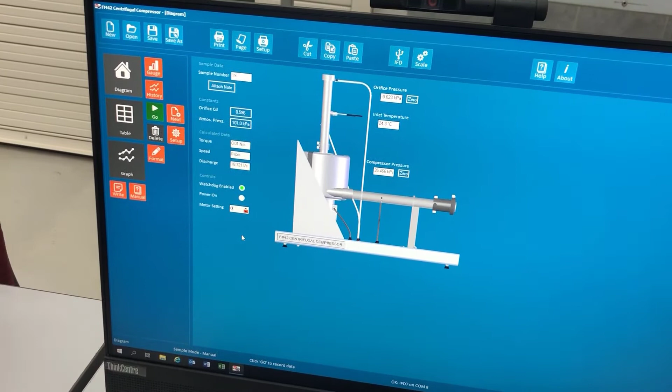So this compressor is interfaced with our software, okay? So our software can give you the reading on torque, on the speed, on the discharge. So this is the compressed air discharge. Also, it can control our equipment by powering it on and setting the motor setting. So the motor setting will give you the capacity of the compressor. Then we have the options to record our reading.

Now in this software also we can read the pressure at the inlet, pressure and temperature. So the air is coming here at the inlet and then compressed in 7 stages. And going out you have the compressor pressure and the orifice, okay?

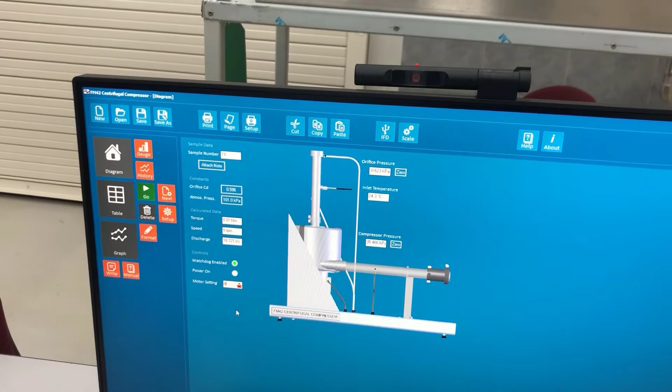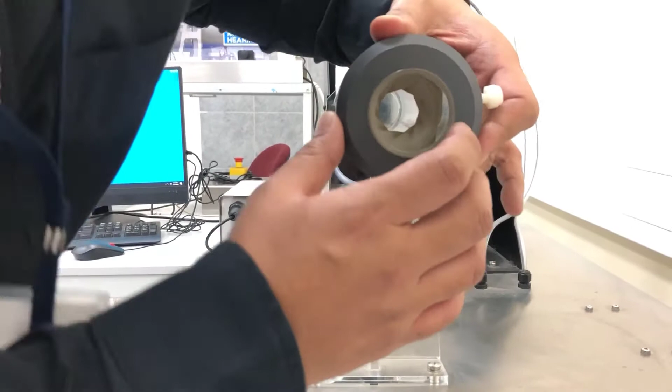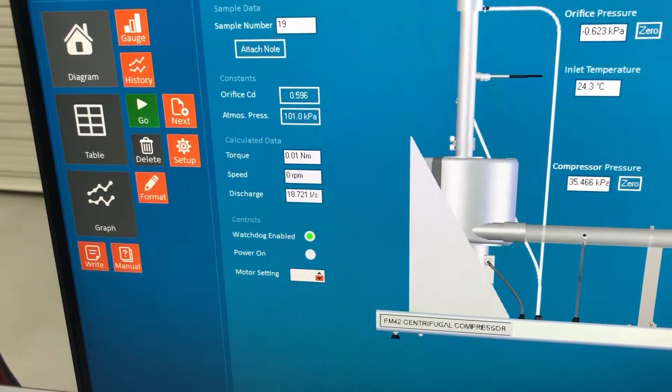So to perform a compressor system characteristic, first we need to set a fixed aperture. So for example, 2/3 opening, okay? At 2/3 opening of our aperture, we will vary the speed. So varying the motor speed. So for example, we will start at 100% with fixed aperture. We will observe what will happen to the reading. So powering it on, start with 100%.

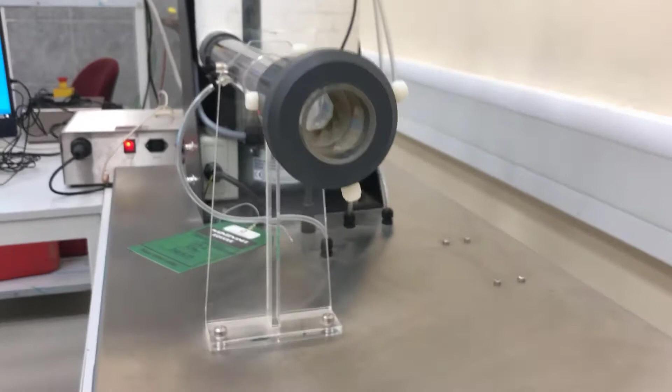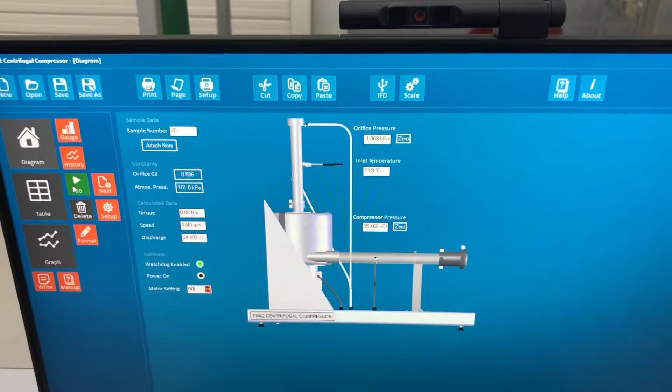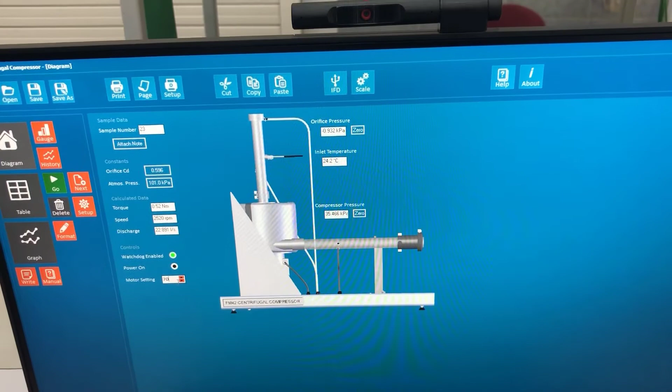Take one reading by pressing this go button here. Then change the speed to 90% with the same aperture opening, which is 2/3 opening. Then press the go button. Then make it 80%. Press the go button. And so on. So I'm decreasing the speed of the compressor. So 60.

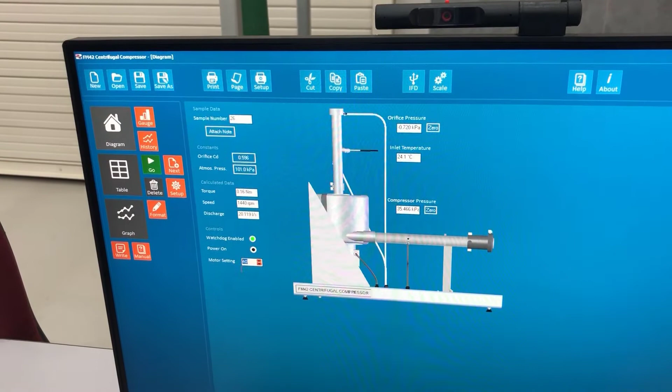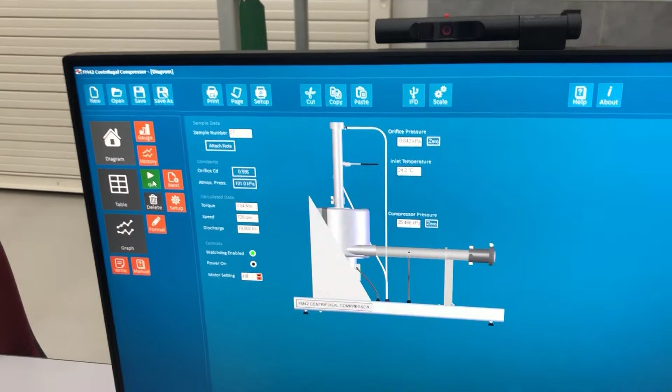50. Take the reading. 40. 30. Go, take the reading. 20. Go, take the reading. And let's say at 10. Go and take the reading. So from 100, I'm decreasing my speed. Okay? Observe the discharge of the compressor. The speed and the discharge.

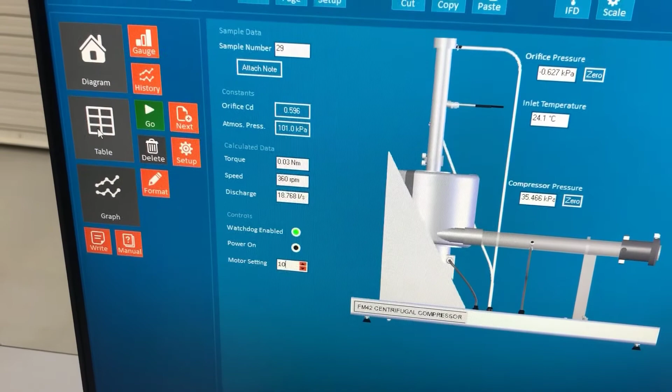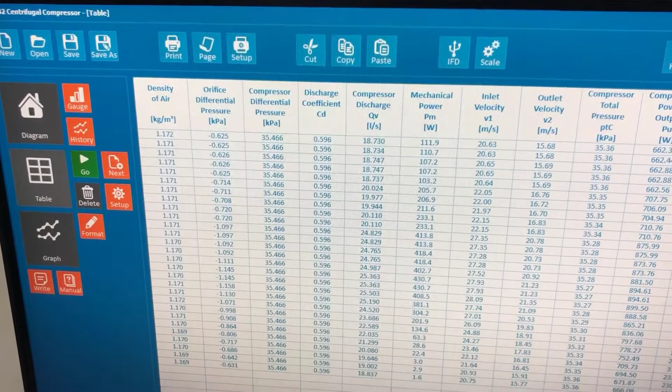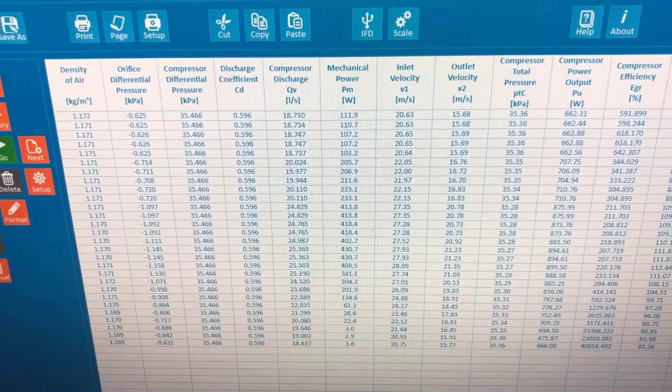So it will be recorded on this table. So by selecting this table, you will see all your readings here. So the density of air, the orifice differential pressure, compressor differential pressure, and so on. At the end of this, you have the compressor efficiency and the predicted compressor efficiency. So you will just need to plot the graph according to the required results on the lab sheet.

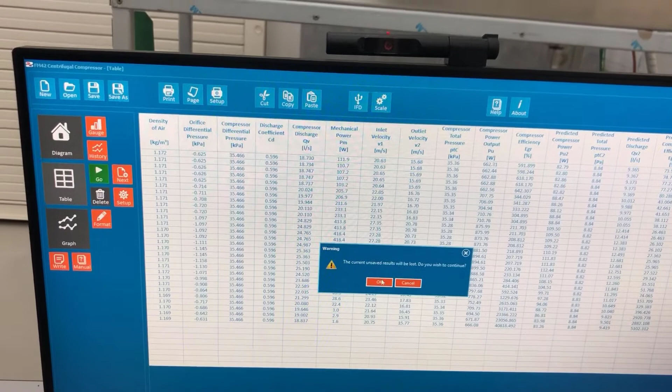Okay? So we can try another trial by increasing the speed. So by selecting this new option here, select OK. Go for diagram. In this case, I will start with a motor setting of 10. So I will change or vary my aperture opening. So aperture opening, I change it for some diameter opening of my aperture.

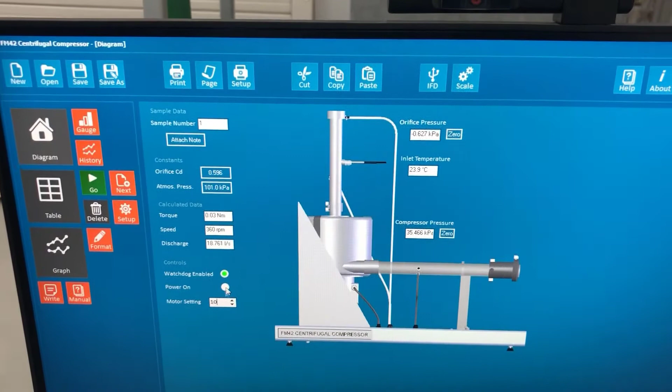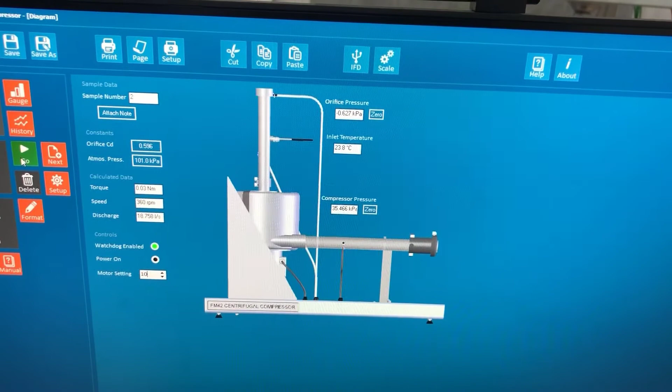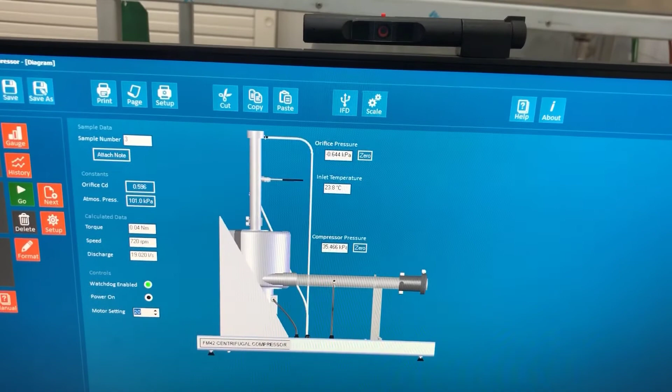So I will start with motor setting of 10. So 10%, okay? 10% of the speed. Record the torque, speed, and discharge. So take the first reading by clicking this go button here. By clicking this go button here, you have about 10%. Then you have about 20. Take the reading at 30. Go.

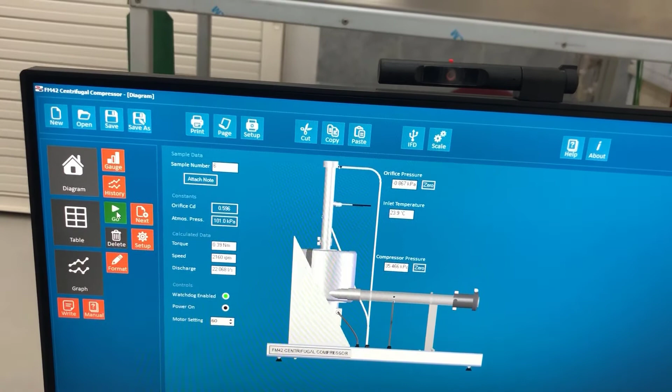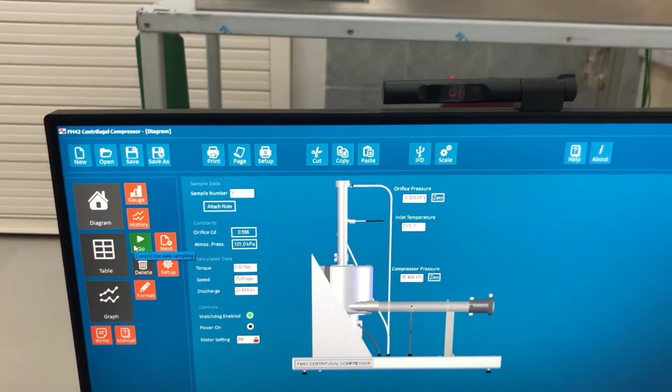40. Take the reading, go. 50. Go. So as you increase the percentage of our compressor settings, observe the equipment, okay? So 60%, 70%, 80%,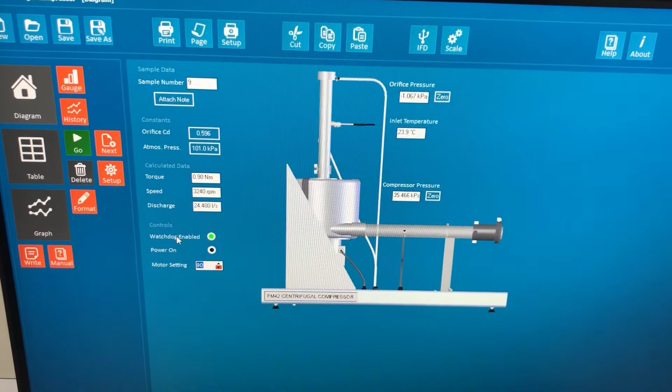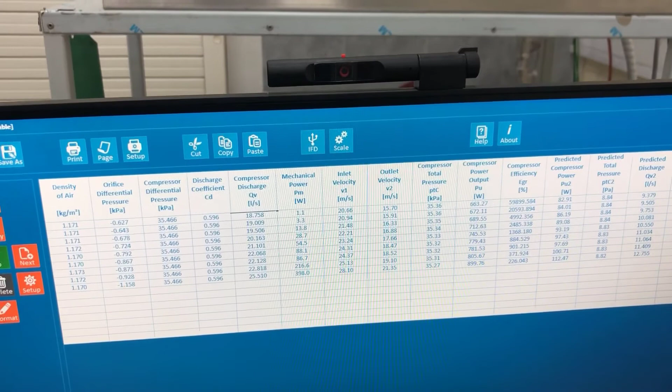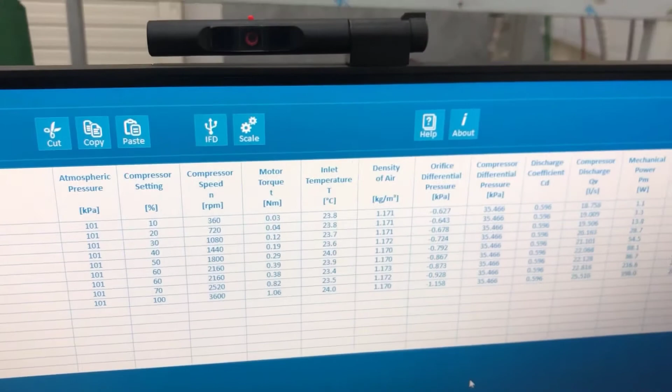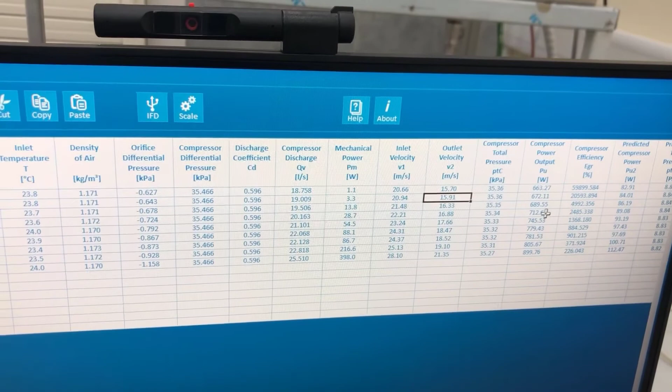90%, and at 100% capacity of our compressor. Press the go button here and take your reading. Okay? Take the reading of the experiment. Okay? So you have the atmospheric pressure, compressor speed, the torque. So everything that you will need is recorded by the software. So the mechanical power, the inlet velocity, outlet velocity, total pressure, output, compressor efficiency.

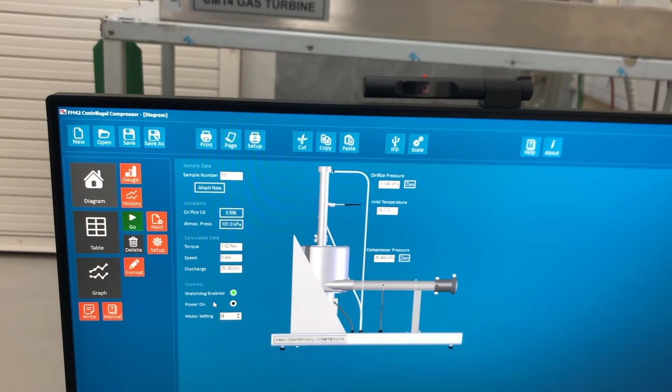What you need to do is to get all the readings, then plot the graph, and make your analysis, discussion, and conclusion about the compressor system characteristics. So the whole system characteristic. Okay. So everything is discussed in the theory. So this ends the experiment on compressor system characteristic.